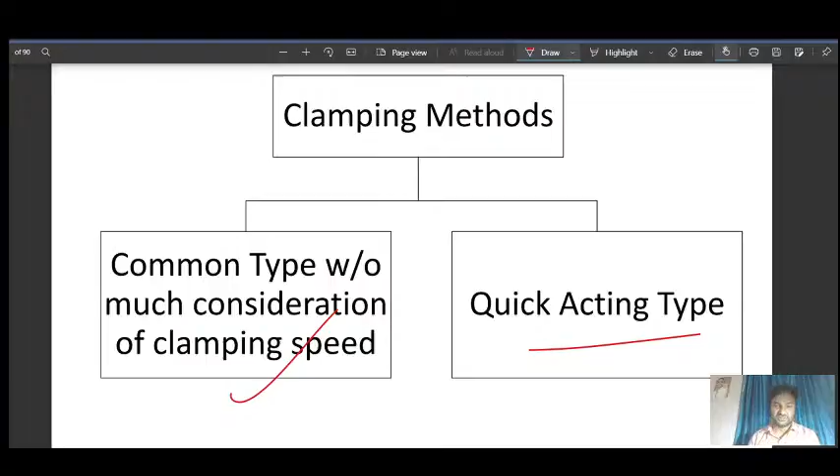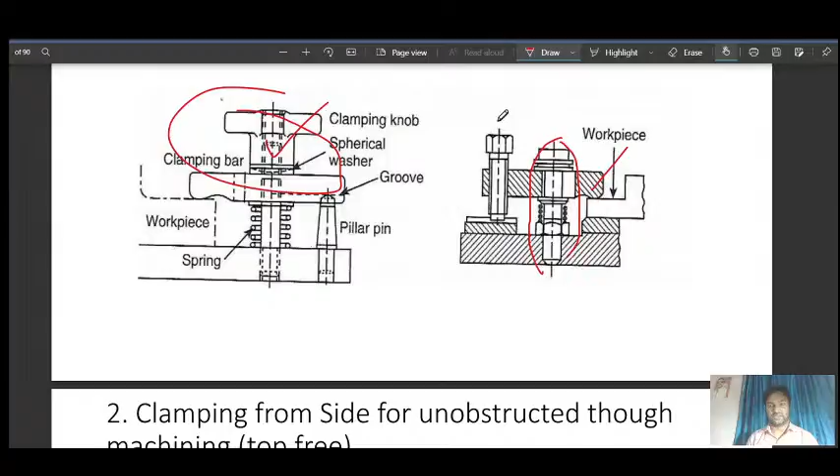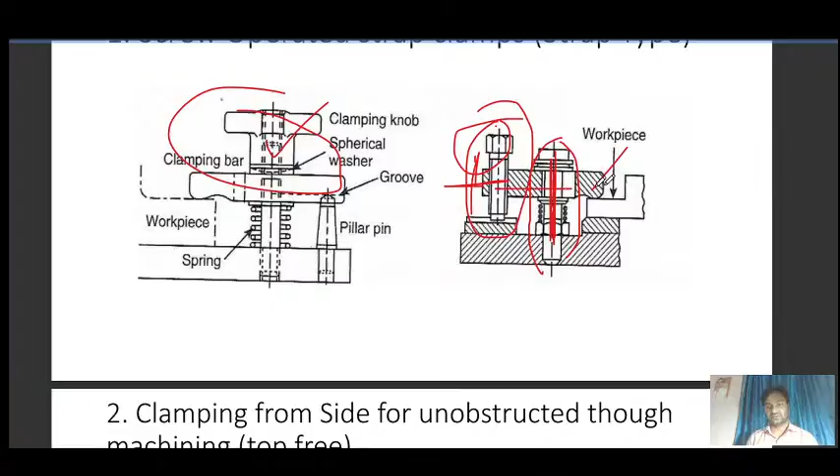As we have seen in earlier discussion, there are two types of clamping system: common and quick acting type. We have completed the common type, so now we will talk about quick acting type. Let's have a revision. In screw operated, you can see the screw with a knob, and this clamp bar is tightly held against this screw. The main function of this is as a fulcrum, and this one is for raising this end up or down. If it will raise, this clamp end will come downward.

So another method from the side. These are various methods to clamp from the sides, so that you can machine the workpiece from the top. Then this was the swing plate. This one is swinging in vertical plane, and this one is swinging in horizontal plane. What we need to do is take out this pin, and we can swing this plate, this clamping bar, and in horizontal plane we can swing it.

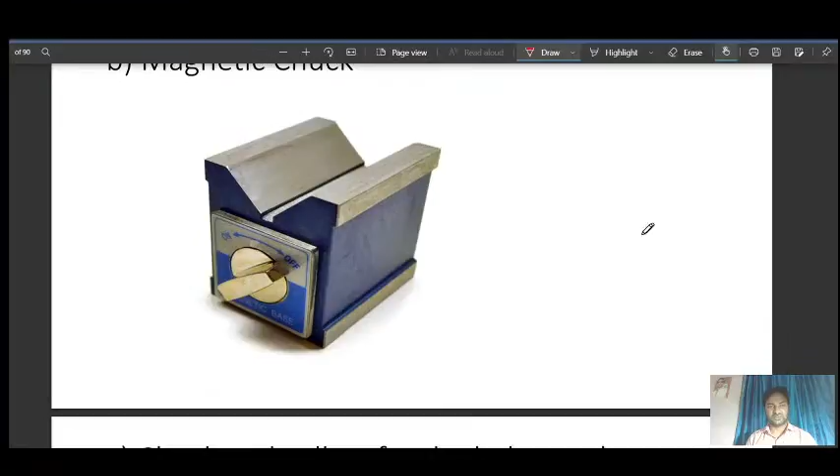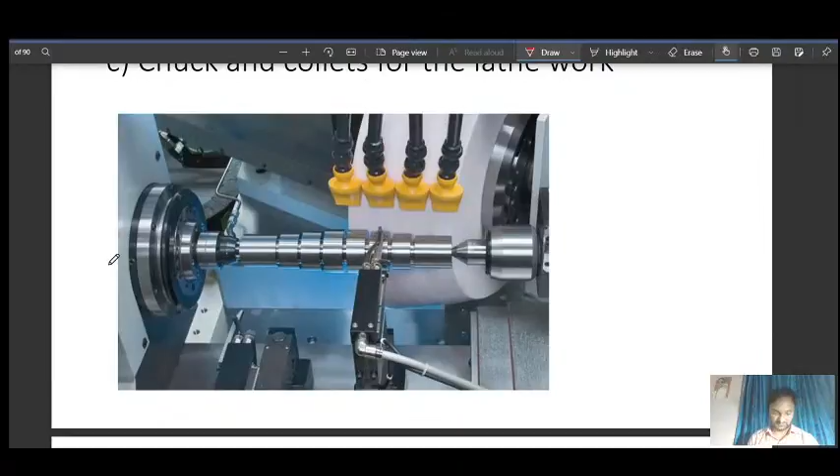Then we also talked about the conventional clamping method - drilling and milling vices we have seen, and then magnetic chuck we have seen also. Then chuck and collets we have seen - this chuck, that center end, and then collets, self-centered, two half, self-centered.

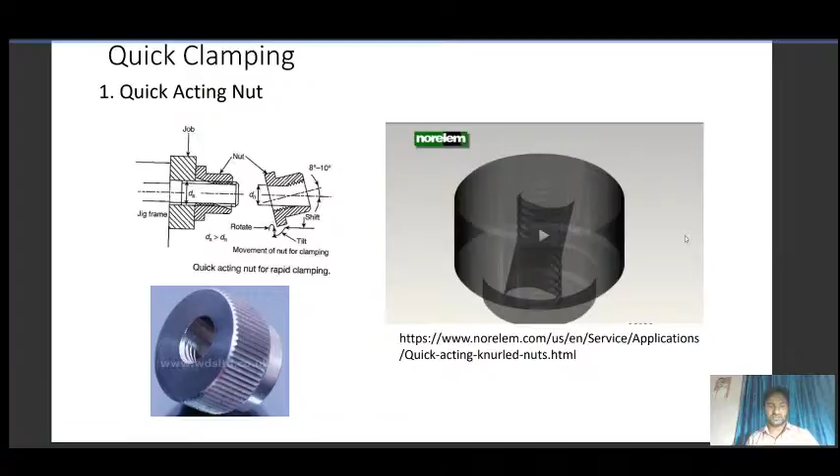Then quick clamping. Here we have the quick clamping. The first one is quick acting nut. As you can see in quick acting nut, we have prepared our nut in this way. Half side is having a thread, and other half it is tapered, and remaining half, you can take it as two parts. One is this half taper - it means half taper means consider as inside part circular. So take half, this side is having thread, and this side smooth surface. Let me zoom it so you can visualize it.

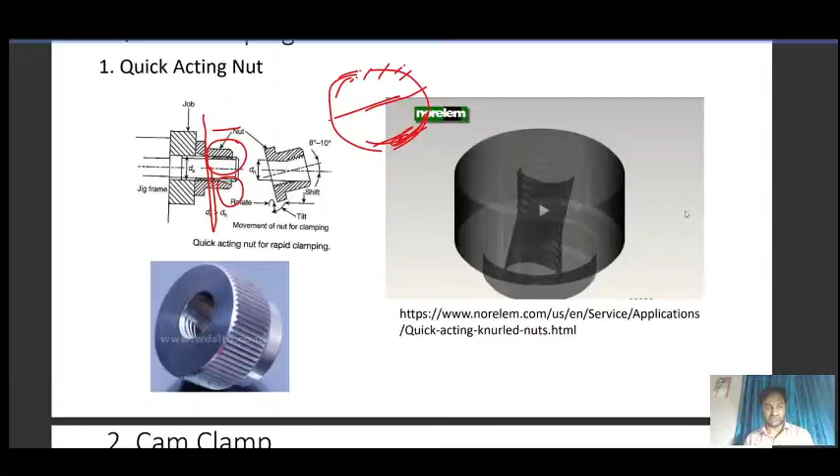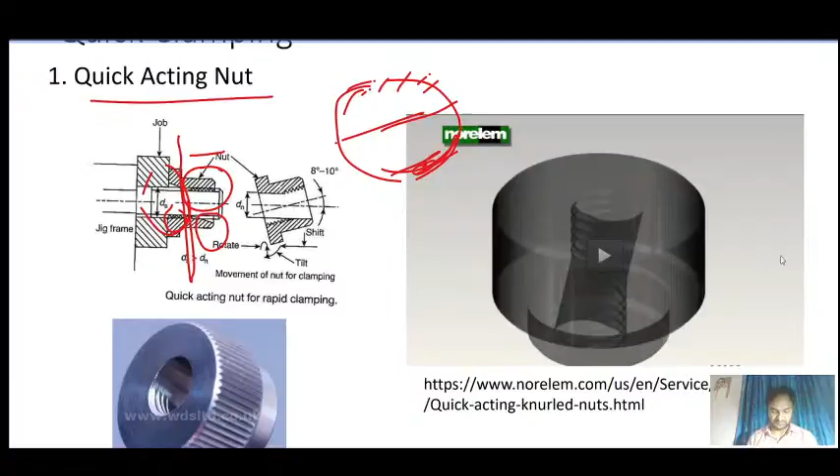And the remaining side, after the half part, same procedure - other half tapered and smooth, and lower part threaded. So this is termed as quick acting nut. Now you can see in this, let me zoom further - this one is smooth surface, and here you can see the threaded part.

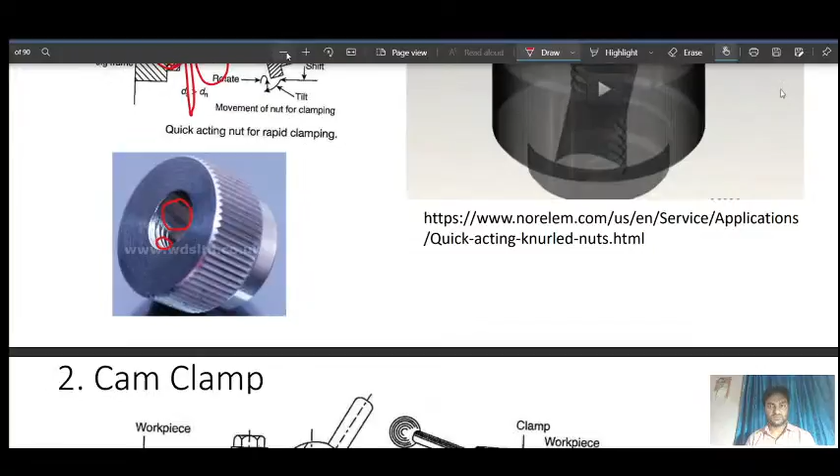I will show you a video here to explain how it works before showing that video. So what we do here is first insert the part in a taper way. This quick acting nut, we insert into this taper nut because this side is flat and this side is having thread, so we insert it in taper way, and then we turn it upside, and then we will lock it. To remove it, we have to unlock it first, taper it, and then take it out. Let me show you a video here, so here it is.

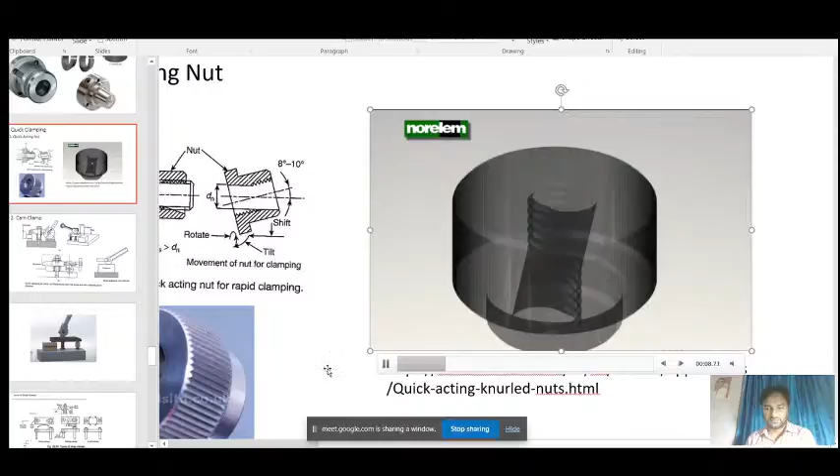So now see, workpiece, another workpiece, then we have inserted the screw, and after that, see this top, we have tilted it, inserted it, then straightened and screwed. To remove it, it is locked now. Let me play it again.

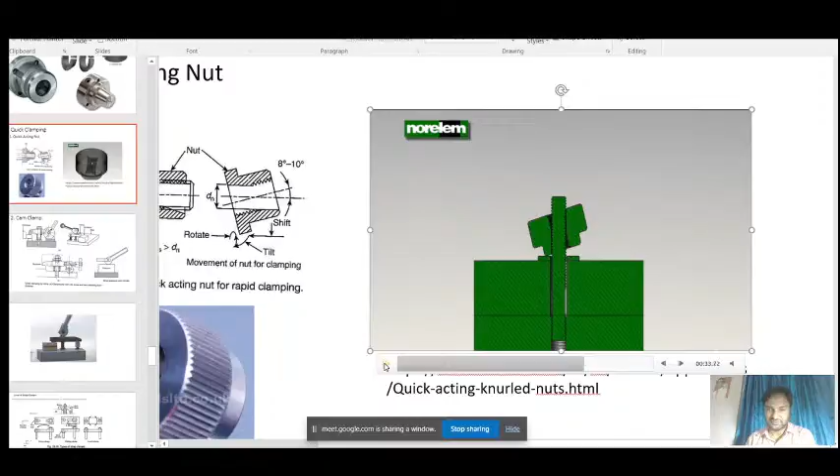Now this one is stud, washer, and quick acting nut. See, I am passing here. You can see this one is having a taper shape, and here half part - this side is having thread, and other side is smooth. So we will tilt it, insert it, tilt it, and then straight. Yes, okay, and then we will tilt it, then rotate - it is locked. Again, in reverse, to unlock it, we have to first rotate it, and then tilt it, take it out. Okay, I hope it is clear.

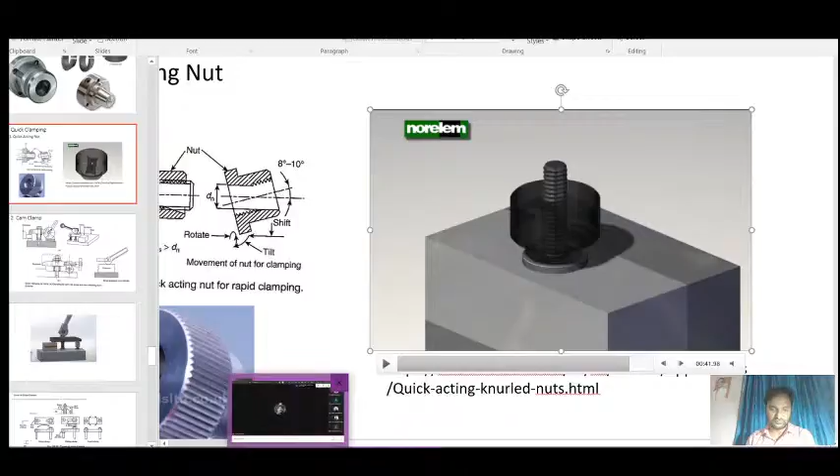So I hope you have got the understanding of this quick acting nut. Next is we have cam clamp.

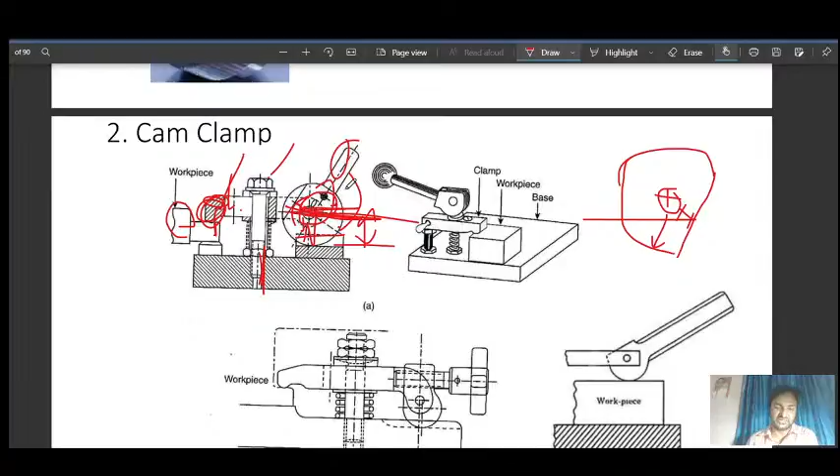Suppose this one is the center, so once you move from this distance to this distance, you will obviously get some rise, and due to changing the axis of the handle, or this mechanism, the clamp bar where it has been clamped will raise upward, and this side will go downward, so we are able to get the locking force here.

We can understand it more easily in this diagram. How we can achieve this? First we have this spring system, and here you can see one end has been locked.

This one has a small distance, this one has a bigger distance, and this one has an even bigger distance. So to lock it, first it is open, and to make this end go downward so that it can press the workpiece, you simply turn the handle, and due to the change in height, this part is the free position, but as you rotate the handle, this part will come and press the clamp bar downward, and your piece is locked.

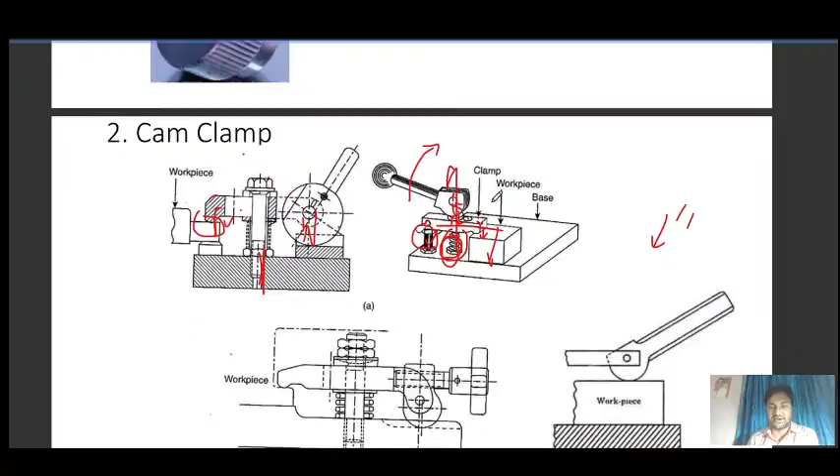Since it cannot go the other direction, only one direction is left to go, and this end will move that way. To unlock it, we simply turn the handle, and this spring system will force out the clamp bar, and the workpiece is free to take out.

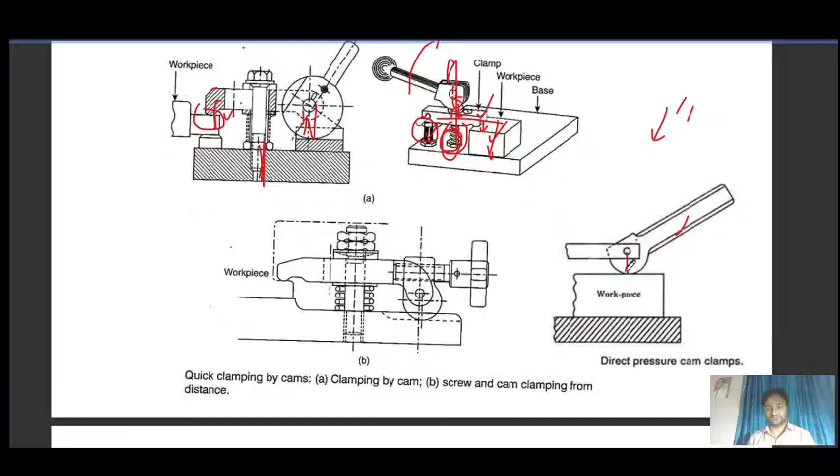I will explain in the coming slide more. Again, you can see the same, due to this, the part is locked, and this one is directly on the workpiece.

Another example: here again we have the clamping bar, this pushing mechanism, and spring system. This clamping end needs to lock the workpiece on this side. So first we will set the position, and here we have again two half nuts.

After setting the position, we will lock it with this knob, so that we have already pressed this part in this direction, this end. So the next task is to lock from the top downward, and we are doing it with the two locking nuts.

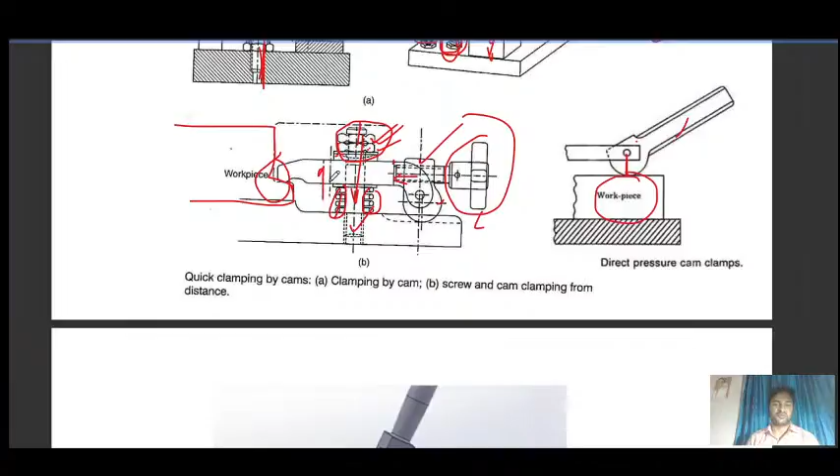So one screw here and one screw mechanism here, and again a spring. When we have to unlock it, we just have to loosen the nut, and then the spring mechanism forces the clamp bar to go upward, and the part is free.

So as you can see, let me show you another video. Let me check whether I have the video or not. Yes, I have.

Now see this clamping wing, what we have here. This end is spring loaded, this one is a fixed pin, and then here we have spring loaded and workpiece and fixed end, and here a cam mechanism. Let me play it.

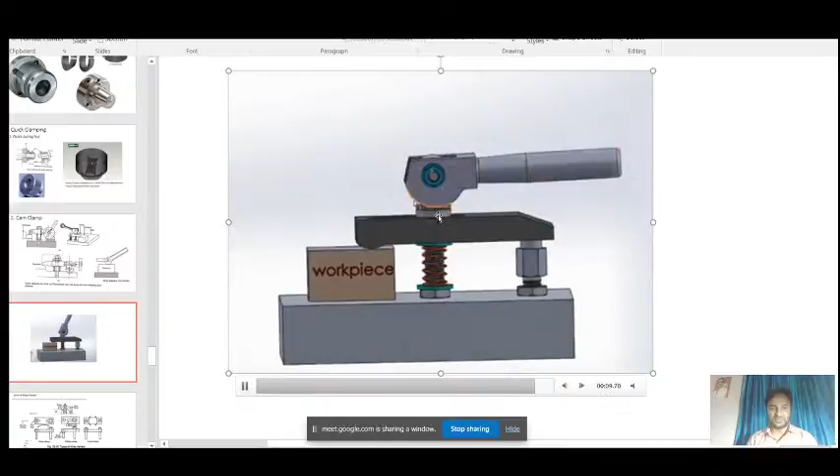See, it is in the free position. Watch here, when we take it out, here it is pressing against here. See this, there is a shoulder on this screw, so it is pressing that shoulder part, and that shoulder part is pressing this clamp bar.

Watch it carefully. Since there is a difference between the center and this end, there is a difference in height or distance. So once you move from here to here, it is compressing this shoulder part, which we can consider as a bush. It is compressing, and the bush is compressing this workpiece, clamp bar, and the clamp bar is pressing the workpiece.

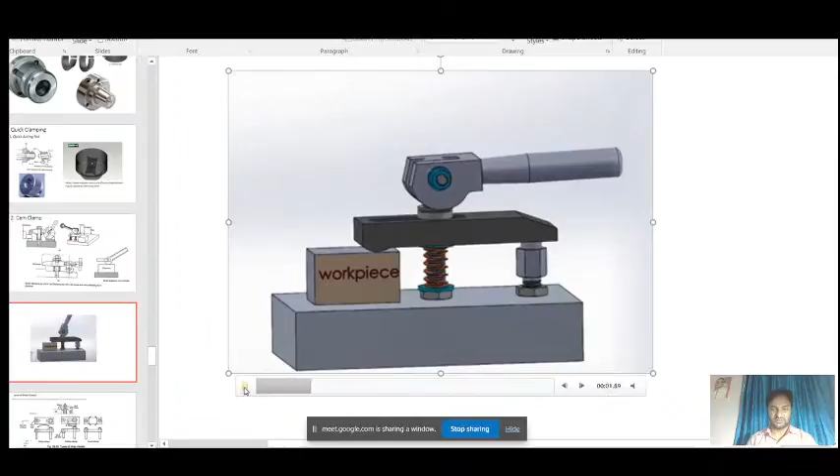Watch it again carefully. See, you can see the clamp end when the lever goes down. When the lever goes down, the clamp end also goes down.

I hope it is clear now. So back to discussion. Now I hope you have understood the working of the clamping mechanism with the cam.

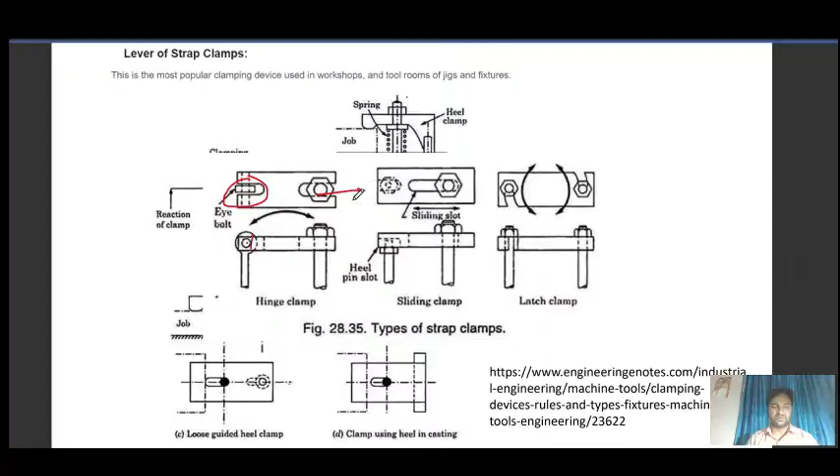So there are other types of clamp. You can see hinge clamp, and here we have this eye bolt. This part is the eye bolt. So what we have to do is simply take this out, open, loosen the nut, or simply take it out, and we are able to take the clamping bar in this direction.

Again, spring type, spring forces the clamp. This one is considered as a heel, and the whole setup is considered as a heel clamp. What we have to do is simply lock the screw or unlock the screw for locking the part, fixing the part.

Then again we have this sliding clamp. This one is a heel pin slot. Here, to lock or unlock it, we simply shift this position and it will lock the part.

Again, this type of arrangement we have, there are two pins. We can take out the pins in this way and our clamping bar is free.

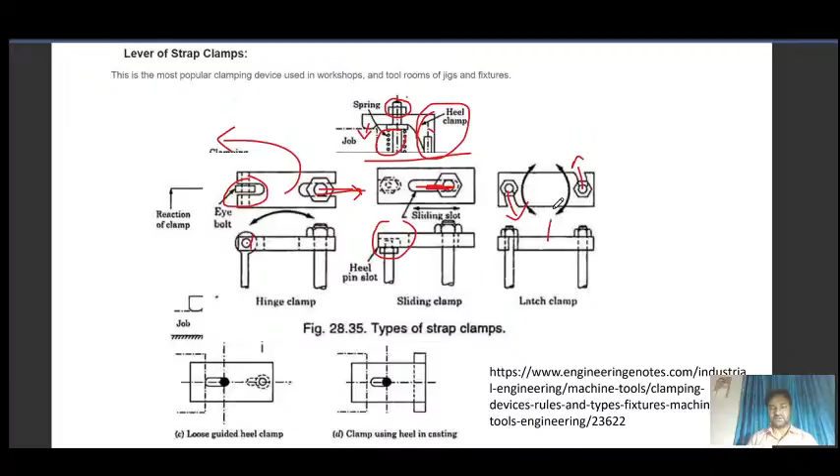Then other types of clamp, loose guided. As you can see here, this one is pin and here is loose guided. Loose guided heel clamp. Simply take this out this way, and we can move the part.

And clamp using heel in casting. As you can see, the heel in the casting can be used by changing the position, and you can learn more here. A detailed discussion on all this is given.

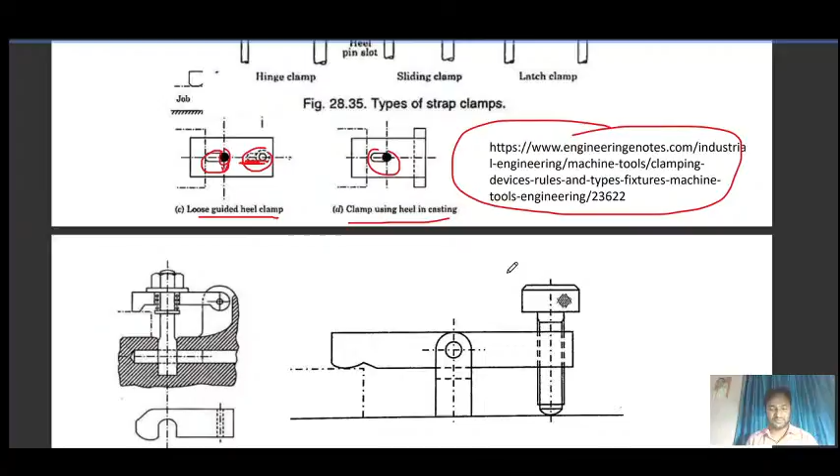So again, this mechanism, I think I have discussed this one. In this you can see, in locking we have one end. With the screw we will press this one, change the height, so that the clamping bar is also having the thread, and this screw is also having the thread.

So by just rotating the screw head, or knurled head, we can change the respective position, because due to the thread either one will move up or down, there would be relative motion. That change in height will cause pressure on the clamp bar against the workpiece. Again, another type, hinge clamp.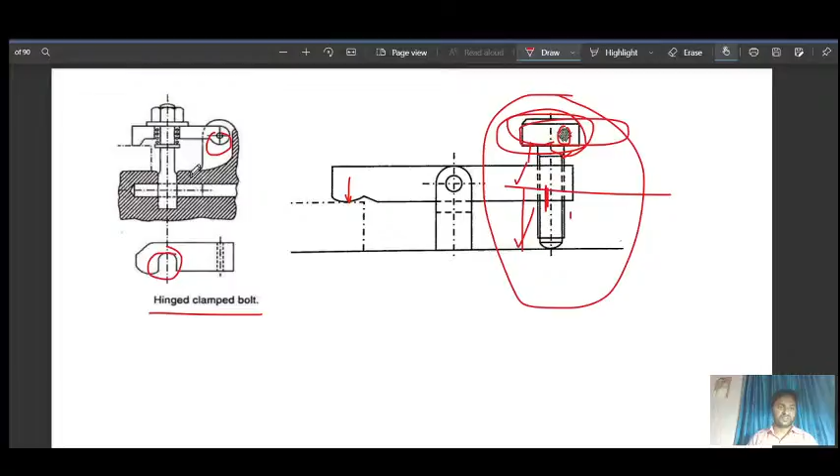As you can see, this one is hinge, and the hinge is having this shape. So there are two ways. First, we have to loosen it a bit, and then we will take it vertically in the vertical plane.

We will take it in the downward direction. Like suppose it is, you can see on the screen, this screw you are taking towards your face. So there are two motions, one this vertical plane motion, and then you will take this, see here, this part, this gap, you have fixed this screw.

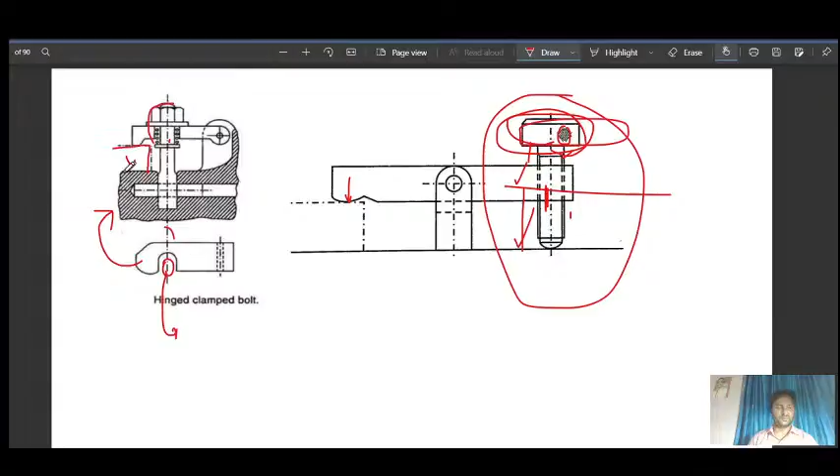So from here you have taken out the screw in the vertical plane, and then in the horizontal plane you can rotate it so that your workpiece is free. This one is your workpiece. Your work is free. So two rotations.

One is vertical plane of this. Here you can see the sliding setup. It will slide, and then again in the horizontal plane, clamp bar.

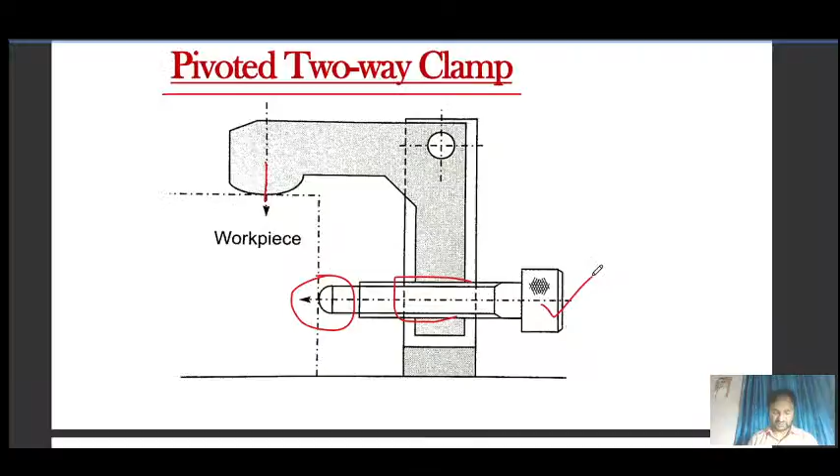Again you can see the pivoted two-way clamp here, one way clamping and another way clamping. You can see the threaded mechanism, and the knurled head you can see with this. When you turn the knurled head, it will press this way. When it goes this way, obviously since there is no other mechanism but only the internal thread in the clamp bar, internal thread in the clamp bar, external thread on the screw.

So obviously there's relative motion: if the screw is going this way, this clamp bar will go this way, and due to the pivoted action, if this one is going this way, this end will come this way. So we are achieving two points: locking, clamping.

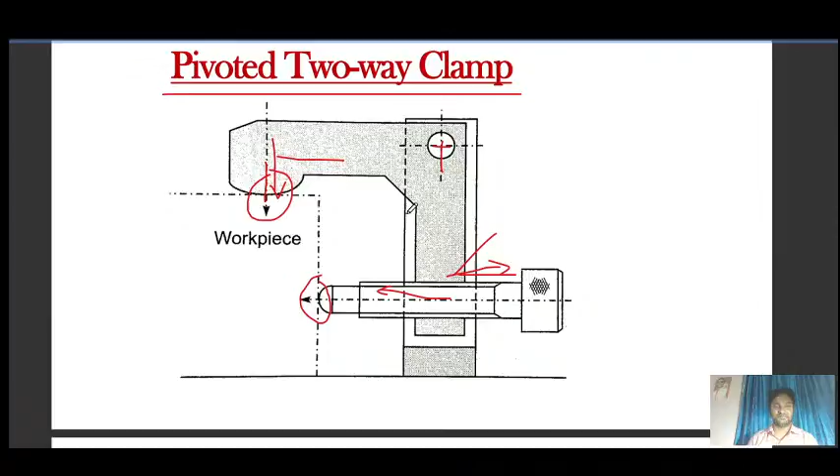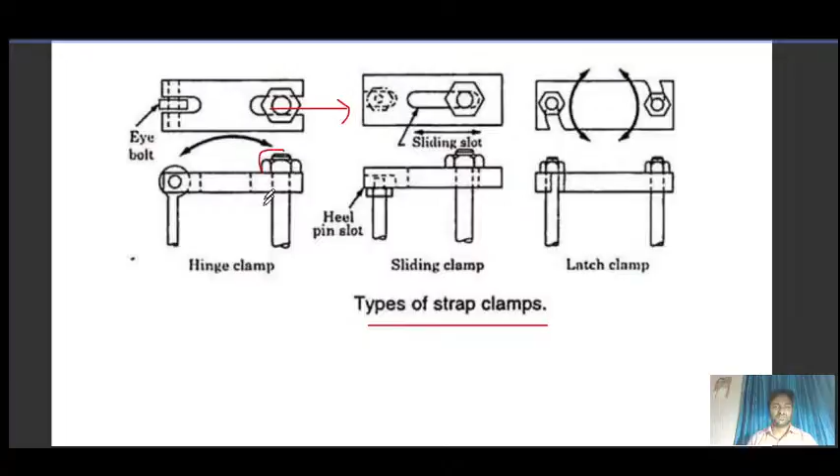Another strap clamp, this one in hinge position. Take this nut out, and this whole part you take out in vertical position, and you can take out the vertical clamp bar or strap in vertical position.

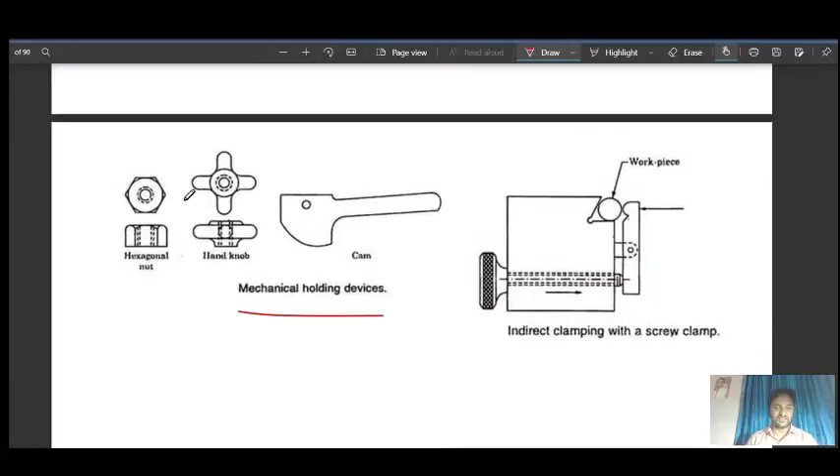Then slide it again, as I've discussed. You can see the mechanical holding devices: hexagonal nut, hand knob, cam handle, and indirect clamping with screw clamp. For indirect clamping, you turn the knurled head, and it forces the clamp bar to move this way. Due to pivoted action, this end comes this way and locks the workpiece.

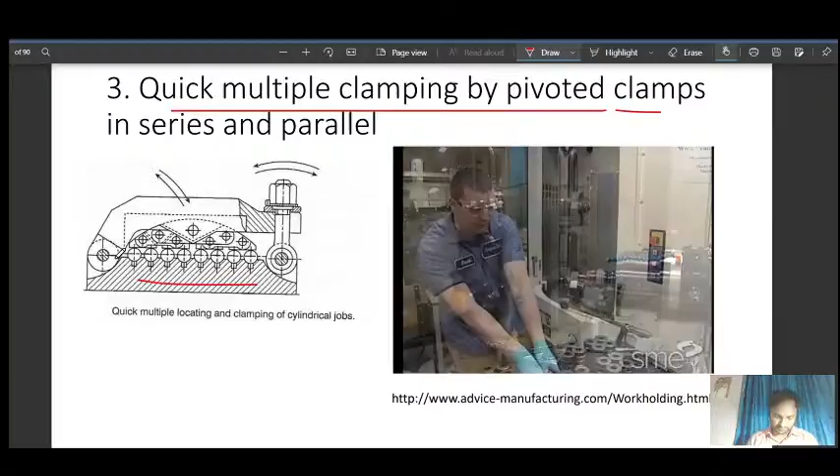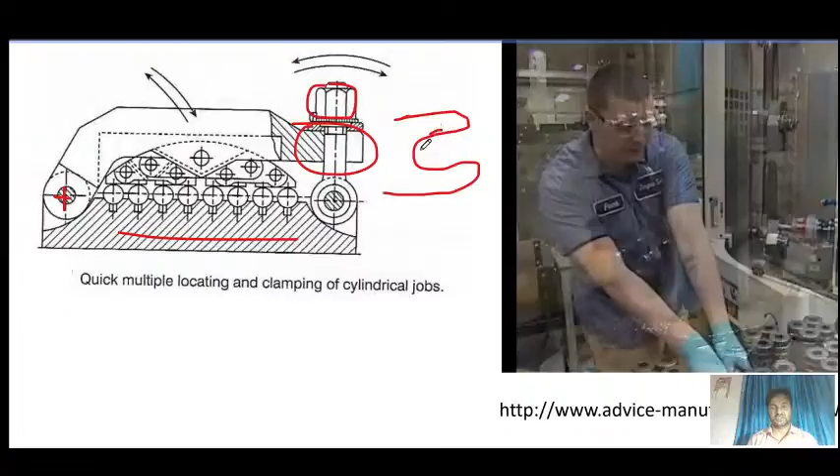Now we have quick multiple clamps by pivoted clamps. You can see a number of parts mounted on a surface. Let me zoom in. This one here is a hinge, and the arrangement is like this, so that this head you can put here and lock through the washer and nut. So what you have to do is simply take this part out and see the clamping head and clamping bar.

This is the clamping bar. No, not this one - this one. Get your clamping bar, and here you can see 1 part, 2 part, 3 part, 4 part, 5 part, 6 parts. You can lock various types of parts in one go.

And here you have the cylinder head type pin, so that if there is any relative motion due to sliding action, the part can be adjusted at the right position. So what we are achieving here is locking many various parts.

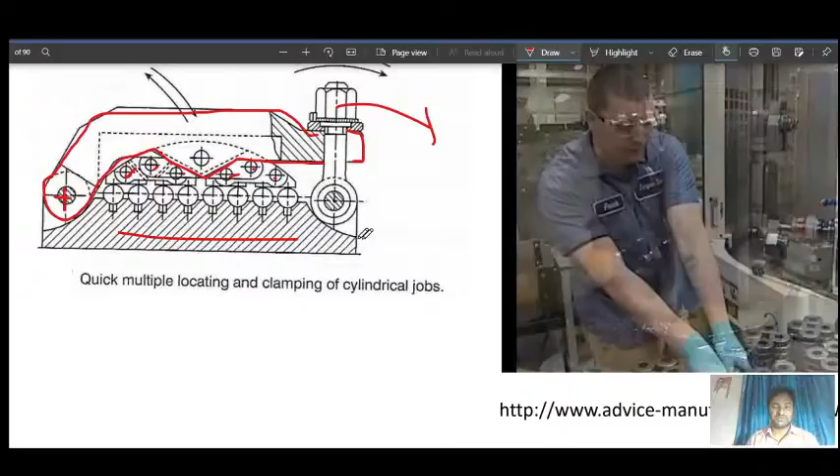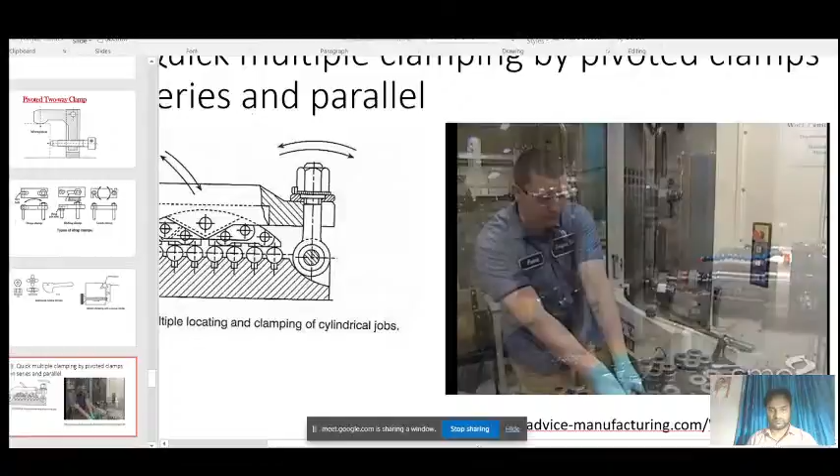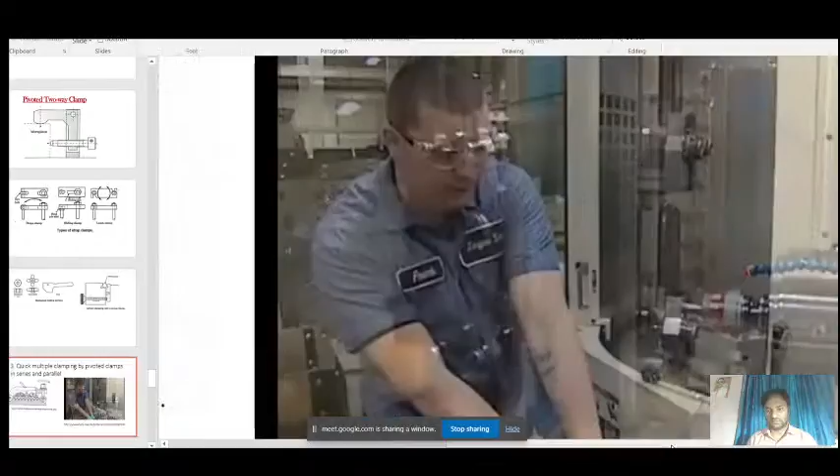I will show you the same thing with another video. I hope it's visible on your screen. Let me play it. See, this person has various parts here, mounted on the pallet.

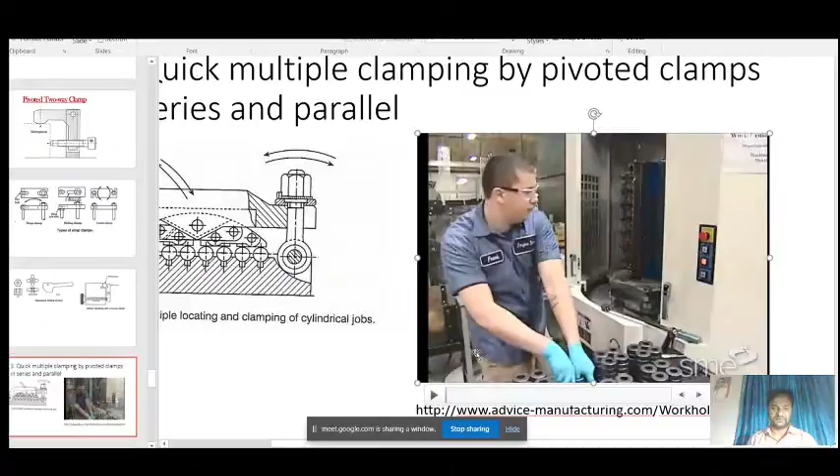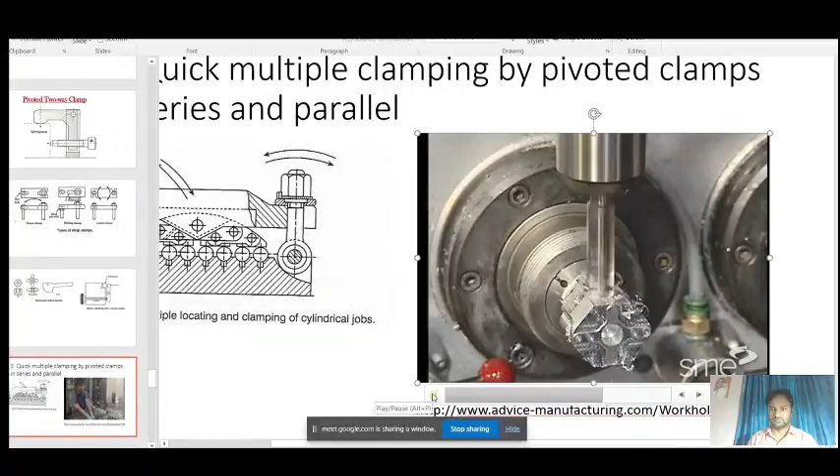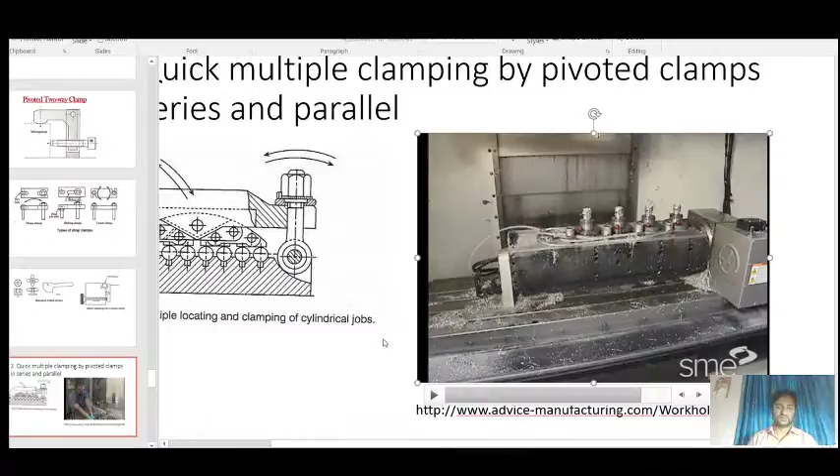After mounting, here you can see 4 parts, and that setup. So what we've seen in the video is only the outer side. This is the inside of the clamping.

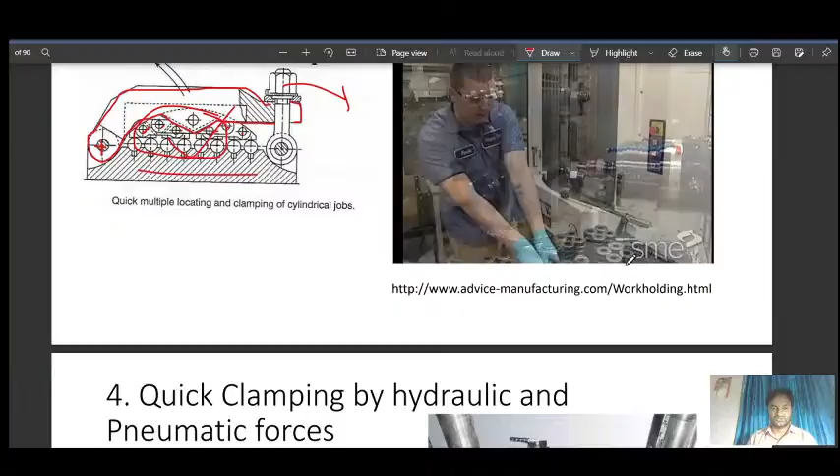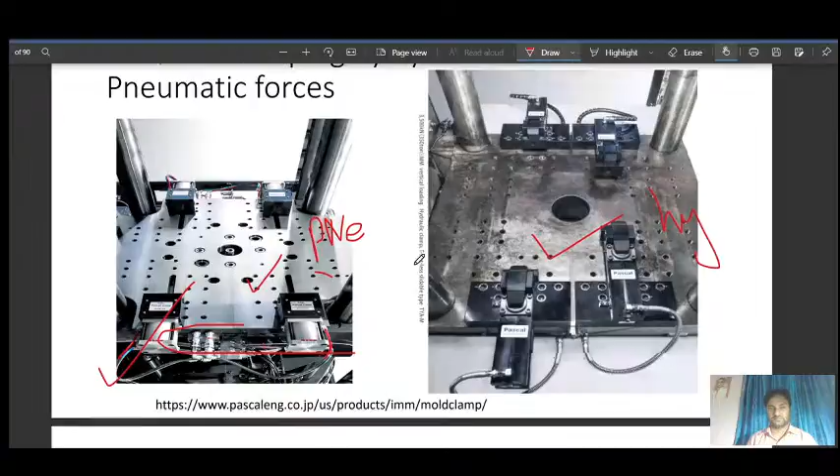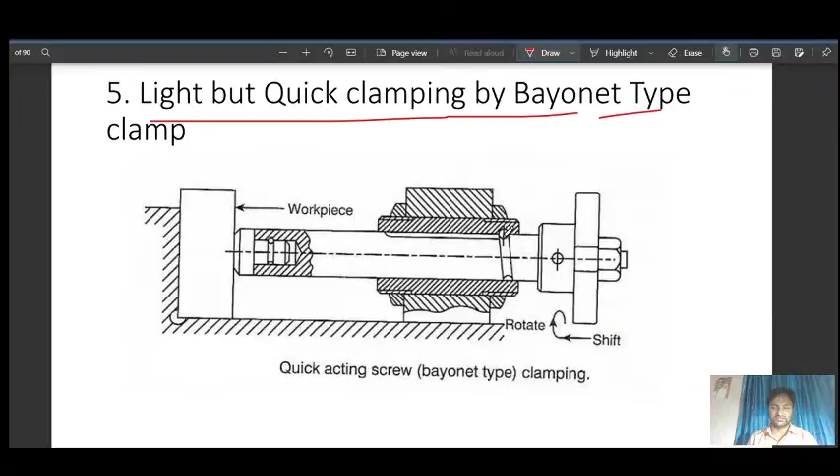Again, light but quick clamping by bayonet type nut clamp. We have this part here, and this is a groove on this part. We will take this down and then slide it, so it fits in the groove. Let's see in the next slide how it fits. We have this one.

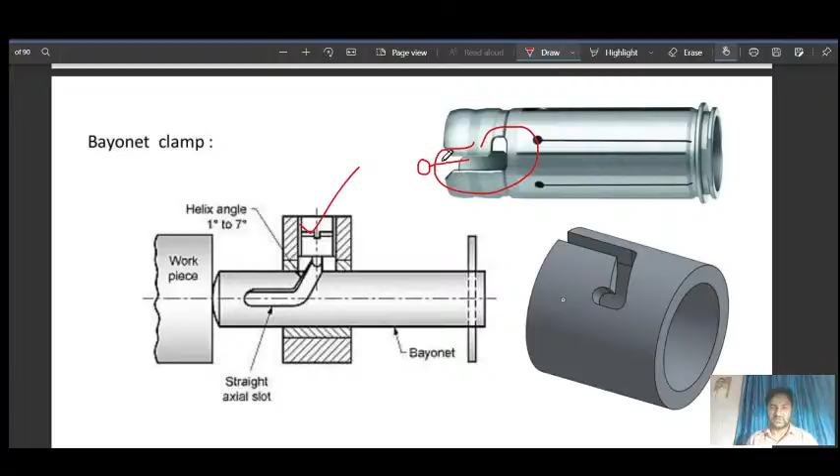This is called bayonet. First you take the part or this clamping device and turn it - first go straight, then turn, swing. As you can see, straight, then swing, and lock it. Here it is locked - the workpiece is on this side and the clamping end on this side. Simply turn this one, which is fixed on the machine table, so it moves this way, locking at this position.

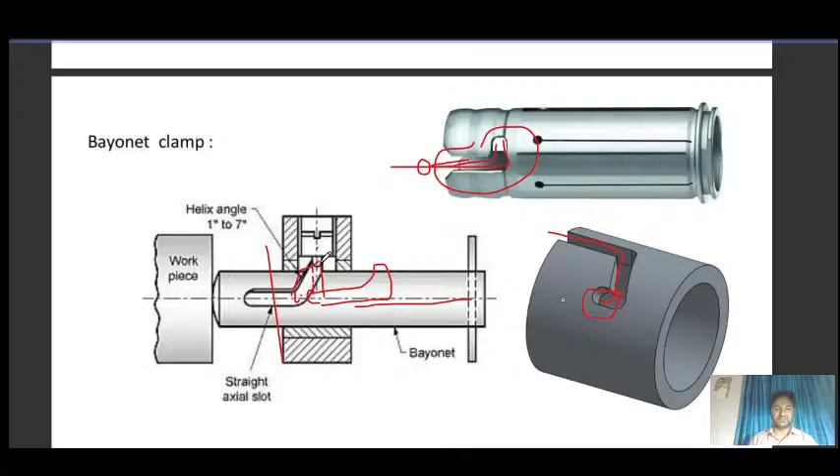To lock it, first this one is at this position so that this end is free. Here there is a gap, and there is a gap. First this end is here - suppose the groove slot would be here, and this end is here. As soon as you slide it, this end goes up to where this pin location is, and then when you swing it, it turns here and locks. You lock it in these two positions.

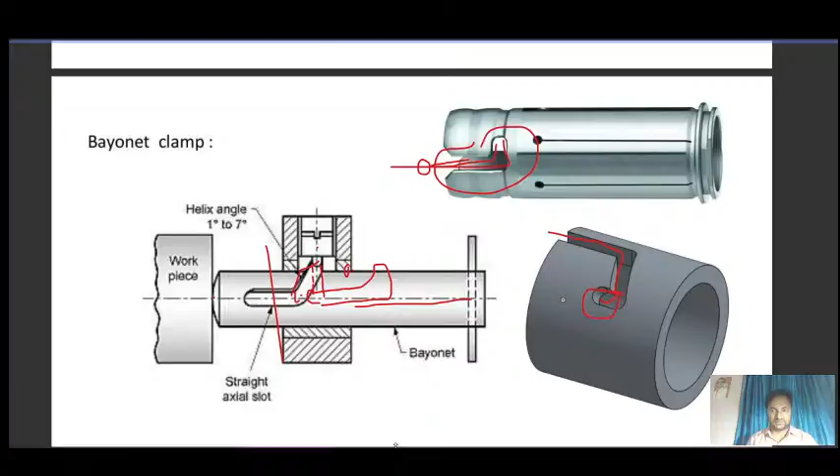There is another mechanism you can use to lock it, and I will share a video on this that you can watch later.

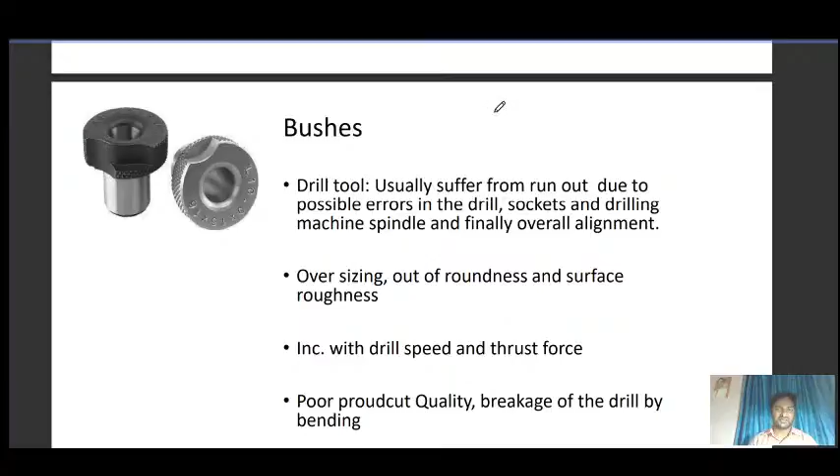Then we have the bushes. What are the functions of bushes? As you know, in designing jigs and fixtures, we have to perform various drilling and milling operations, and due to that there is wear and run-out of the drill tool, which causes defects in the part like oversizing, out-of-roundness, and surface roughness.

Drill tools usually suffer from run out due to possible errors in the drill. There can be error in the drill, socket, and drilling machine spindle, and finally overall alignment. If the drill axis is not aligned with the machine spindle, then we will again have wear out of the drill bit, and this increases with drill speed and thrust force.

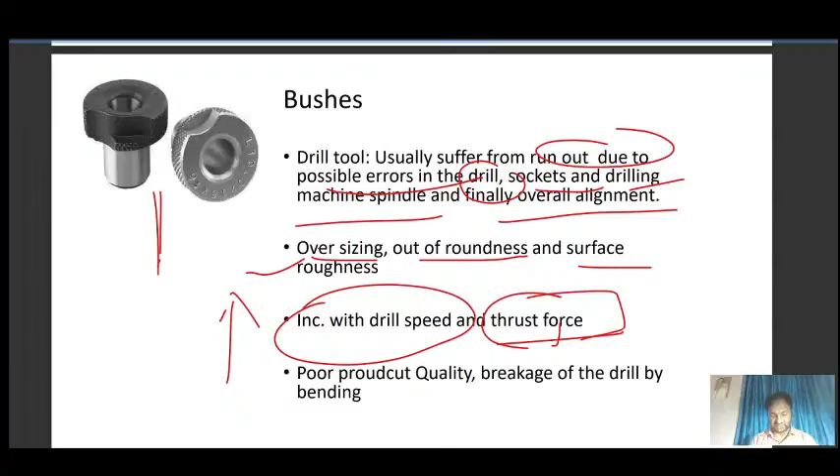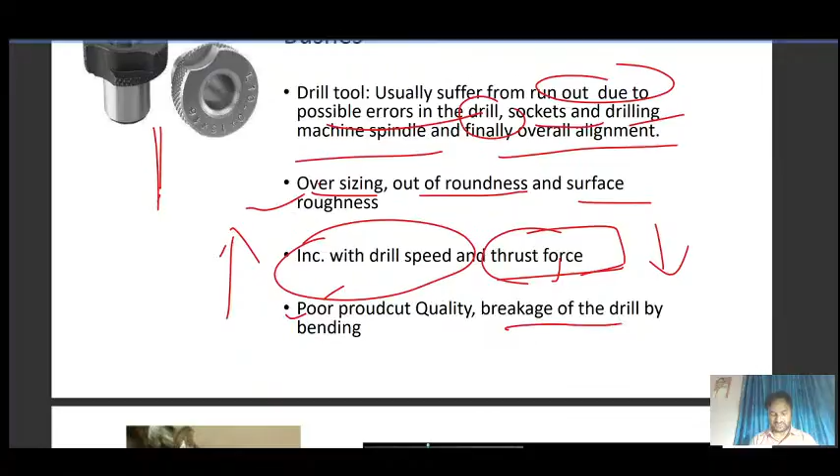The more we use the drill tool at higher speed, there is more run out, and if you are pressing against the workpiece with high force, then again more tool wear and more tool run out. So what does it do? It affects our product quality. Breakage of the drill by bending also happens.

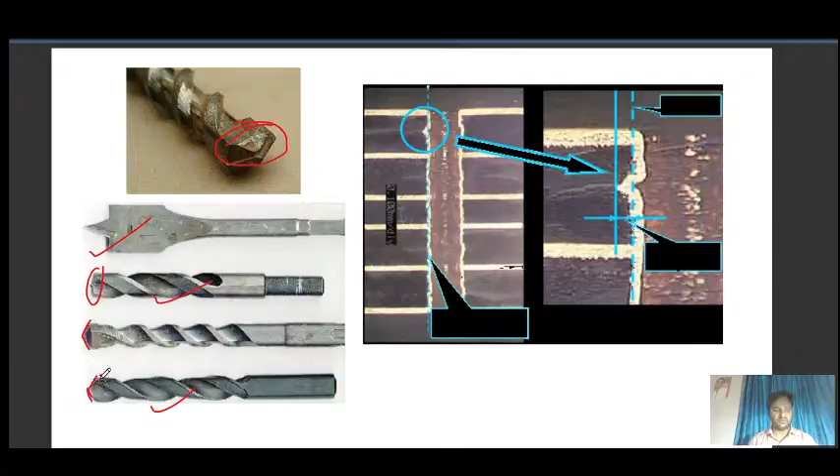As you can see, this is the drill bit or tool body, and here you can see the tip. There are different types of drill bit available. Due to this run out, you can see there should be minimum wear at this end, but due to cutting forces and friction, wear happens.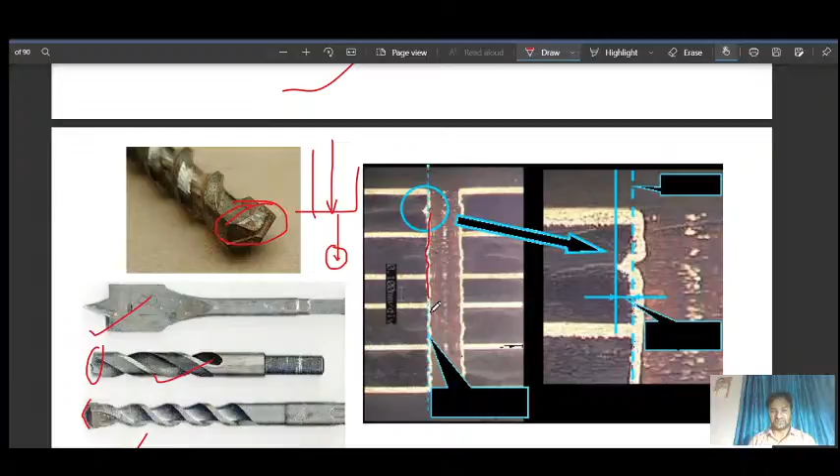When you drill for a small distance it is not affecting much, but when you drill a deep hole or a small hole with a slender tool, and suppose we have used a worn out drill bit for drilling, this type of waviness occurs. If you extend it further, you can observe in this area what type of surface we are getting - not a smooth surface. So surface roughness is another important factor.

So we need to ensure first that the drill tool has minimum wear and its axis is aligned with the machine. For that purpose, we use bushes.

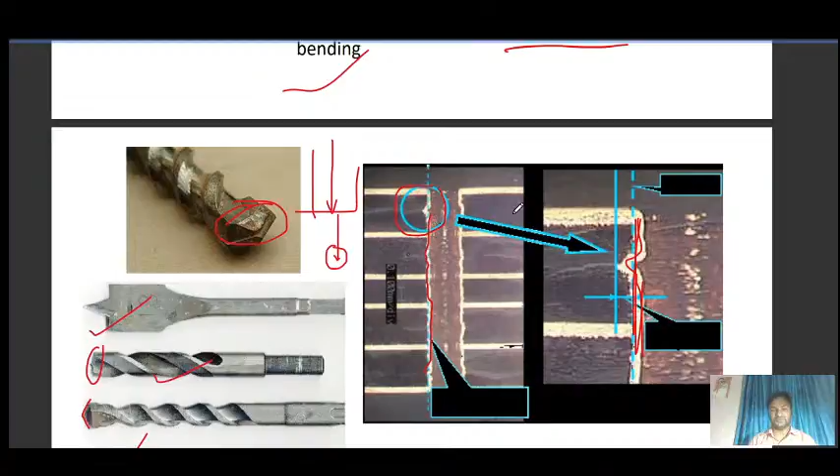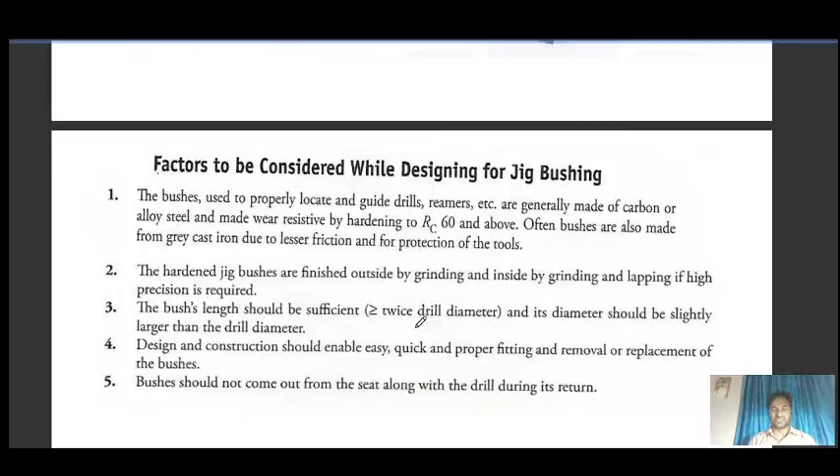What are the factors we need to consider while designing jigs and bushing? First, bushes properly locate and guide the drill. Reamers etc. are generally made of carbon or alloy steel, and made wear resistant by hardening to Rockwell hardness C scale 60 and above. Often bushes are also made of grey cast iron due to lesser friction and for protection of the tool.

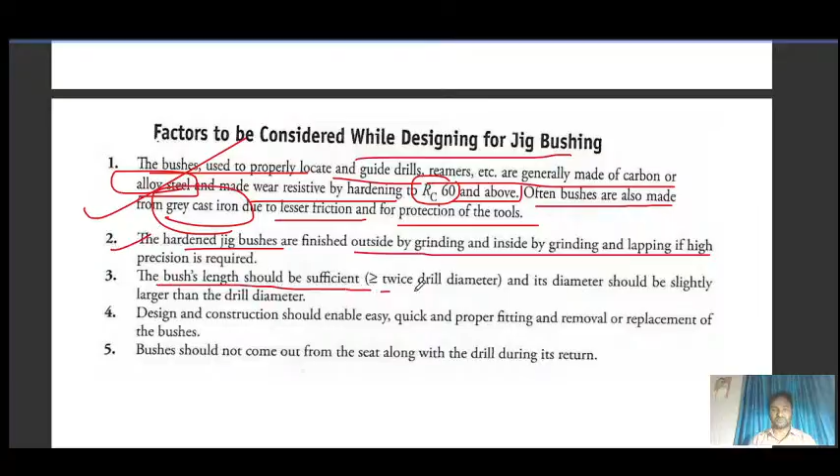Hardened jig bushes are finished outside by grinding, and inside by grinding and lapping if high precision is required. Bush length should be sufficient, meaning twice the drill diameter - we are talking about this height. Its diameter should be slightly larger than the drill diameter, obviously.

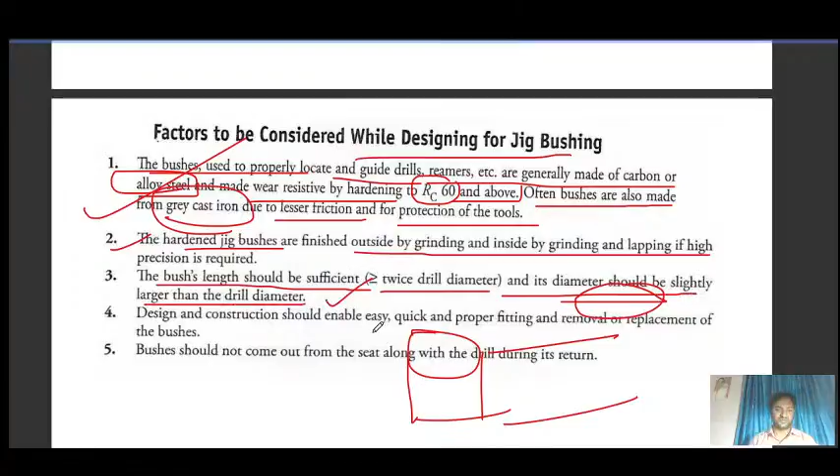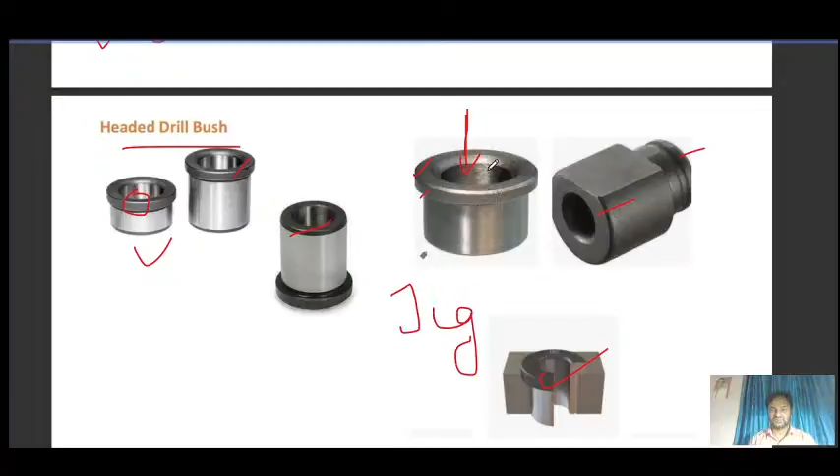Bushes should not come out from the seat along with the drill during its return. This means when we have set the drill tool, we are using this bush as a tool guide, and obviously it will be used in the jig. So one requirement is that it should not come out when we take out the tool.

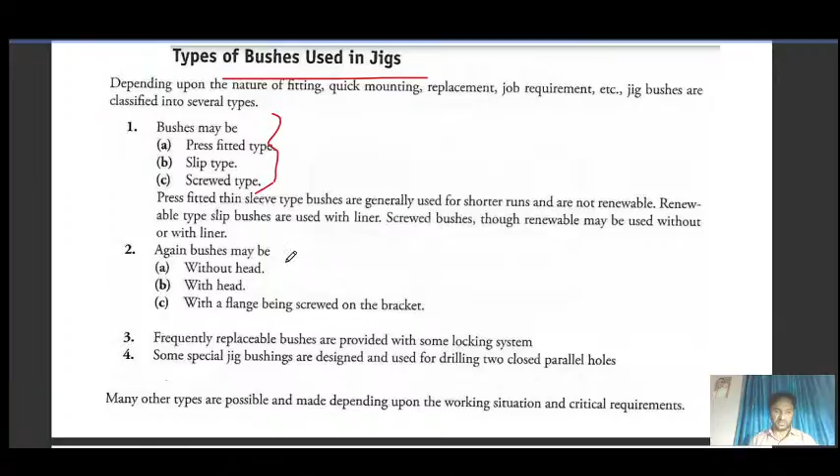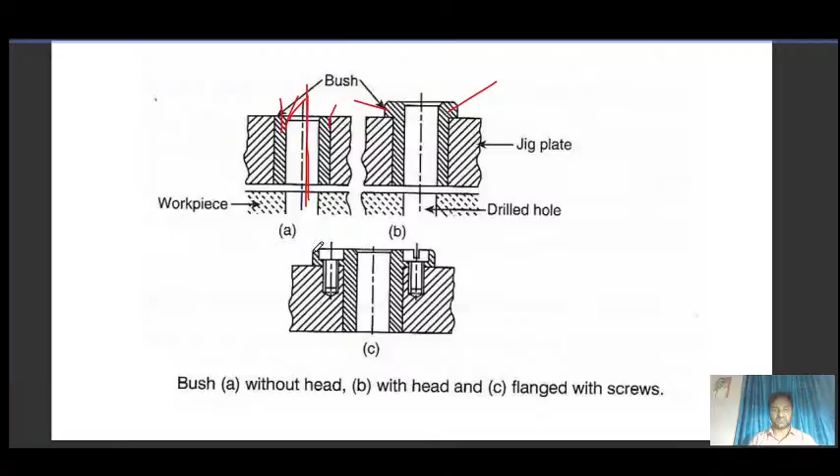Types of bushes used in jig include press fitted type, slip type, and screw type. Again, bushes may be classified as without head, with head, with flange, with screw, or bracket. These bushes are used for drilling purposes so that your drill axis aligns with the hole axis. Here you can see without head, and with head, and then flanged, where you can see the flange area and lock it with the screw.

Frequently replaceable bushes should be designed like this so you can easily replace them frequently. These pins are used to lock the bushes so that they do not come out. As you can see here on the flange, it is locking the bushes.

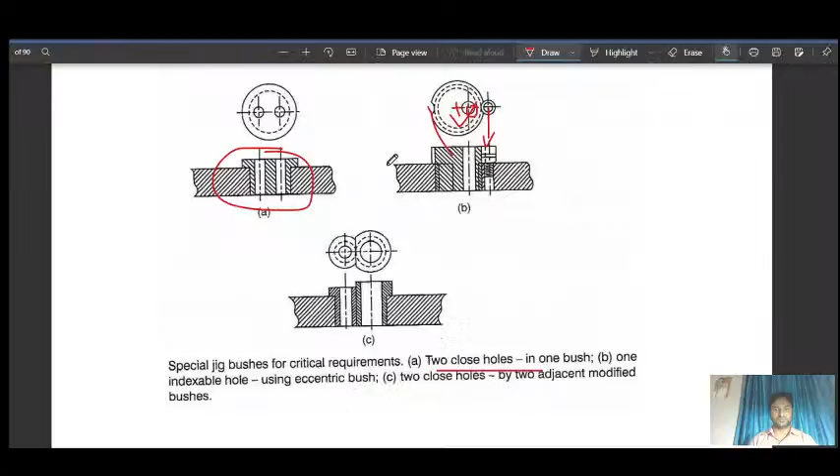Again, here we have two close holes made by two adjacent modified bushes, for very close holes. With this, I have completed this part, and if you have any doubt you can ask me.